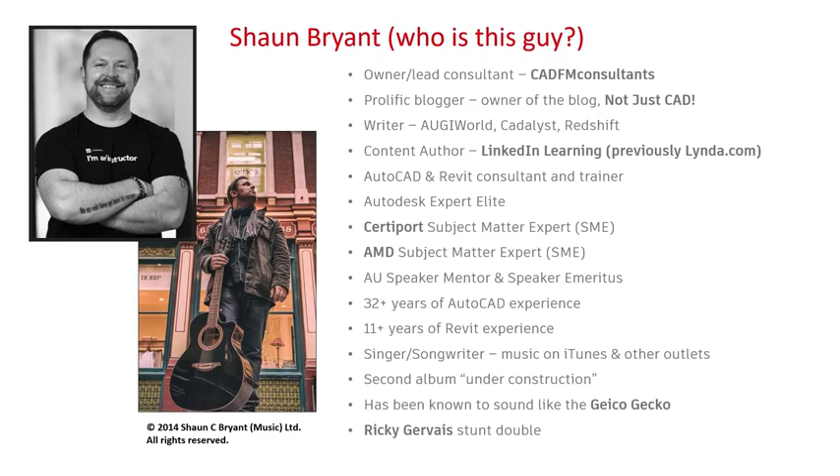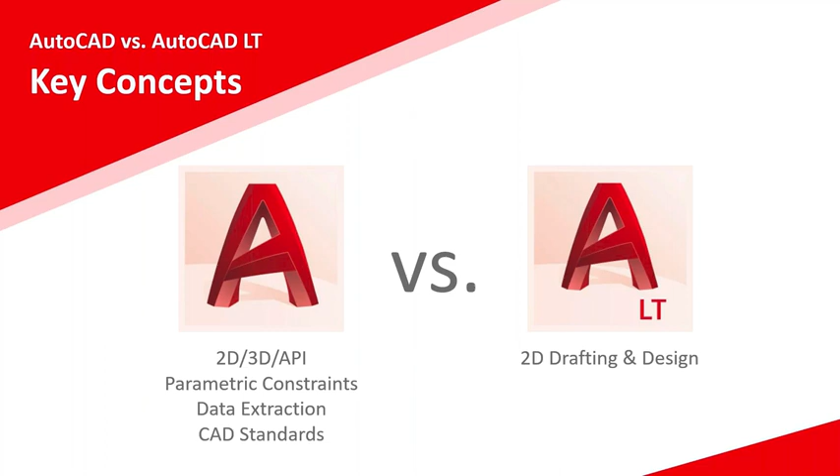We're going to see, from a productivity and time-and-motion environment, how AutoCAD stacks up against AutoCAD LT. Moving forward into a really good visual slide, you basically get an 86% overall productivity gain. There's a little asterisk next to that, and a disclaimer at the bottom saying the study was designed by Autodesk and commissioned to an outside consultant, so your results may differ, you may not get exactly 86%. But to give you an idea, when you're working in full AutoCAD and doing 14 hours of work, that's pretty much the equivalent of 100 hours of work in LT, or vice versa. If you're working in LT and do 100 hours of work, you could do that in 14 hours in full AutoCAD, hence the 86% productivity gain. This means an AutoCAD designer can generate designs up to 7.1 times quicker compared to AutoCAD LT. That's a pretty cool statistic when you think about it.

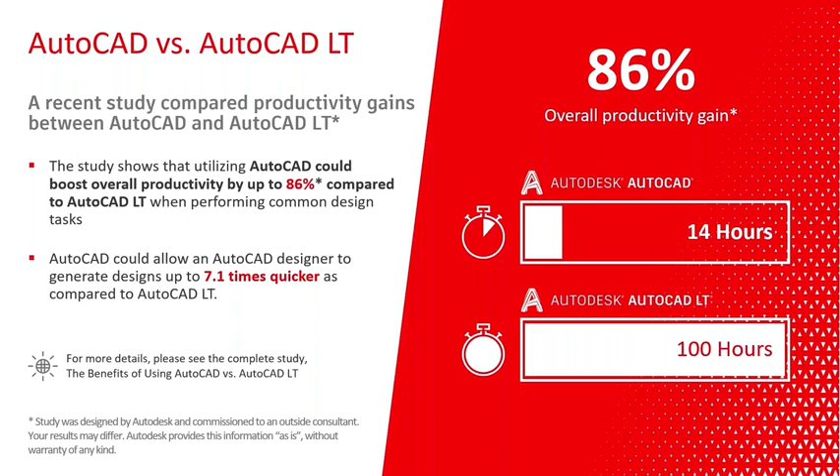There is a productivity study available from Autodesk called The Benefits of Using AutoCAD versus AutoCAD LT, which is the basis of the presentation today, and we're going to go through that in more detail. Let's have a look at what the productivity study actually covered, the time savings. Again, a couple of little asterisks there at the top, a disclaimer just to say that every effort has been made to make sure these tests are as fair and objective as possible.

Your results might differ to the percentages that I'm quoting here on the screen.

Parametric constraints in full AutoCAD offer a complete geometric and dimensional constraint creation, editing and management suite, giving roughly 33% time savings. When creating plans and elevations in full AutoCAD, you can save about 46% because you can manipulate 3D solids when 3D modeling to give you those plans and elevation views, rather than having to create them from scratch in 2D in LT.

Isometric drafting is another fantastic tool available in both AutoCAD and LT. But if you create 3D objects, the isometric representations are just a couple of clicks, whereas in AutoCAD LT you've got to use 2D modeling and isodraft. AutoCAD can view these 3D objects in isometric views almost immediately using the view cube, which I'll go into in more detail later. The time saving here is 61% - a big time saving.

Data extraction is one of my favorites with full AutoCAD, with a time saving of 93%. We've all been there counting all the objects in a drawing. The data extraction command in full AutoCAD, not available in AutoCAD LT, interrogates the drawing, providing block and attribute data and various other pieces of data that can then be taken out of the drawing and put into an Excel spreadsheet or a database. You can even add an AutoCAD table.

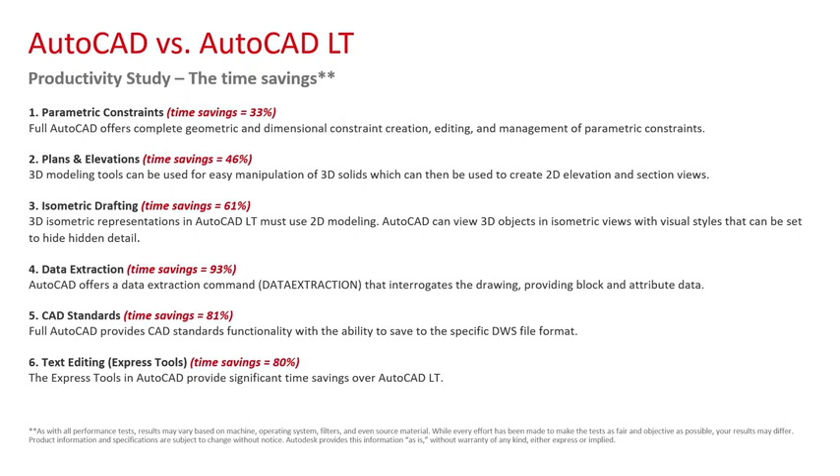And the little disclaimer at the bottom basically says that those percentages might not be exactly what you get if you are moving to the full AutoCAD from AutoCAD LT.

So let's move into the first one - we're going to have a little look at parametric constraints. You've got geometric, which is your geometry, and dimensional constraints in full AutoCAD with a time saving of about 33%. What that means is you can assess the geometric and dimensional constraints using the show and hide functions, so they're not there all the time. You can switch them on and off like your layers, and you can edit and delete those constraints where applicable to allow the design to meet any changes in the specification.

There's no constraint creation in AutoCAD LT, but they can be edited and deleted in AutoCAD LT, which can sometimes put the cat among the pigeons, because you might delete a constraint in LT, it goes back into full AutoCAD in a DWG file, and that constraint isn't there anymore. So you have to put controls and procedures in place, especially if you've got a combination of full AutoCAD and AutoCAD LT as your platform for drafting within your organization.

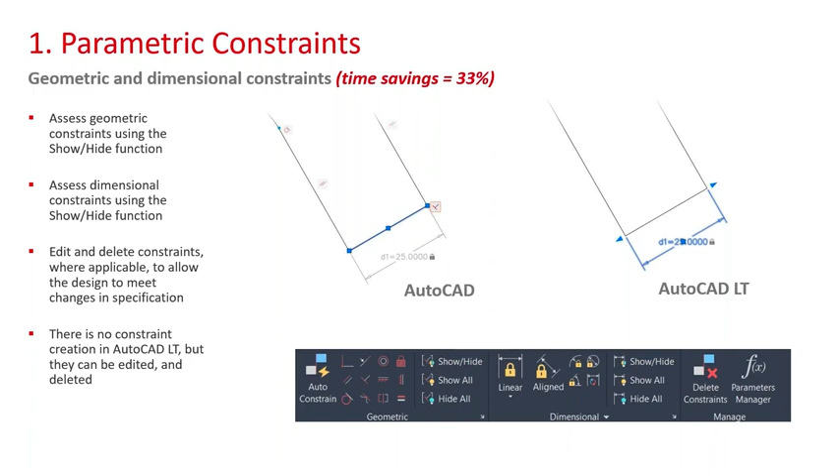What I'm going to do now is jump into a simple little video that takes us through a simple bracket drawing. You can see at the top of the AutoCAD screen, it's bracket.dwg. I'm just going to run the video now, and as we go through it I'll explain what's going on in AutoCAD. We've got the parametric tab in full AutoCAD, and what I'm doing now is hitting show all for geometric and dimensional constraints, of which there aren't any at the moment.

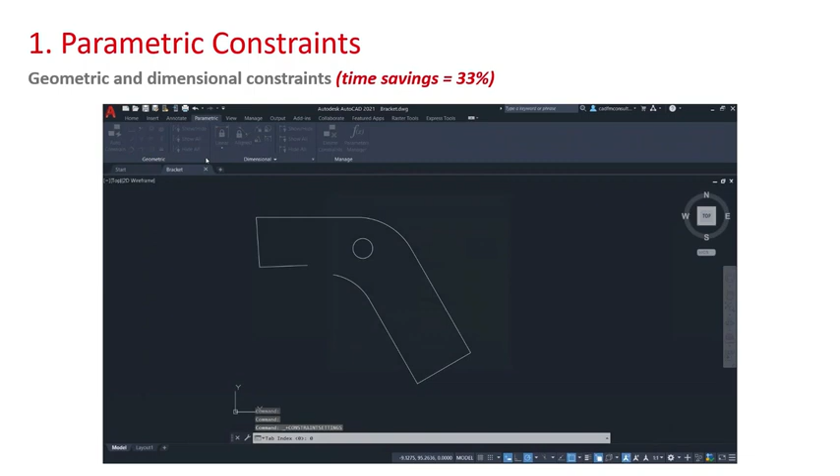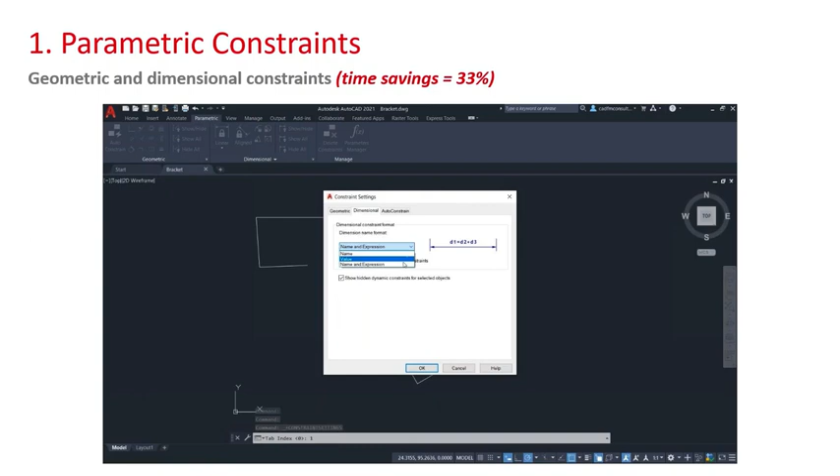Then what we're going to do is jump through all of the settings. You can see that's our geometric constraints for our geometry. If I hit the arrow on the panel, you can see that you can put names and expressions in for your dimensional constraints, for example. And then auto constrain - a fantastic function in full AutoCAD.

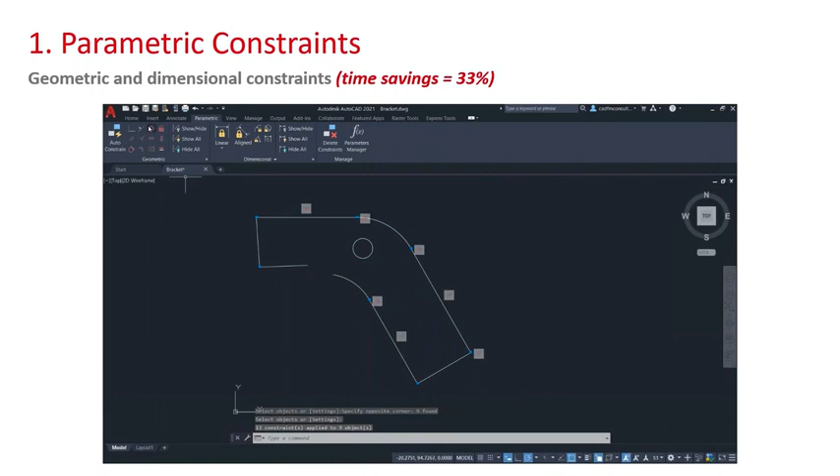Auto constrain applies constraints to all of the geometry for you automatically. So what I can do here is select everything, just use a crossing window, press enter, and there's my auto constraints - they've all appeared, and AutoCAD has created those for me. I can then start thinking about concentric constraints, like making sure the hole in the bracket is concentric with that arc at the top.

And then I'll make sure that we've got some coincident points to join up that gap, so those points now are always coincident together. Then we'll start working on some of the line work, making sure those lines are parallel to each other. And we don't want a wonky corner there, top left, so we're going to make sure that's perpendicular as well. So all of those constraints will hold that bracket together now. And that's our geometry in place.

So now we want to think about dimensions of our bracket. I'm picking those 2 points there and applying an aligned dimensional parameter, and I'm going to put an expression in saying D1 equals 25. So that now becomes the D1 constraint, which is 25 units long and it's locked.

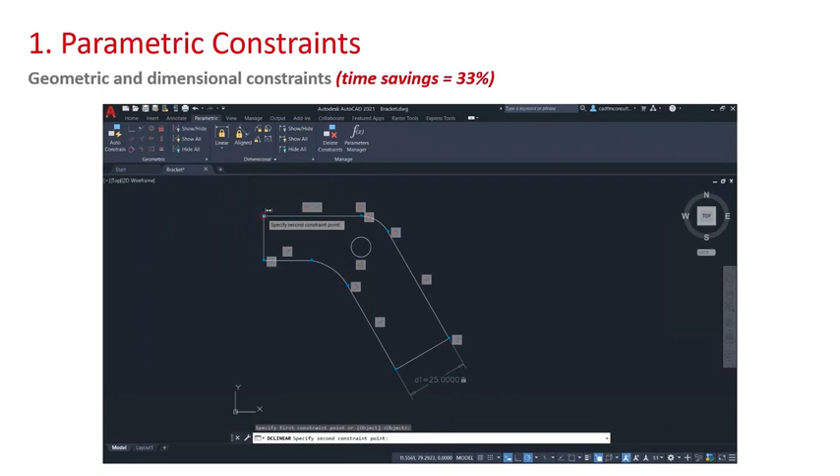I can then consider something like a linear, horizontal, or vertical constraint. I can go linear here because I know that this is already perpendicular to the lines - remember, we put that geometric constraint in. And that's going to become D2, but I'm going to say that D2 equals D1 plus 5. So I'm adding those expressions and tying everything down to pull the bracket together.

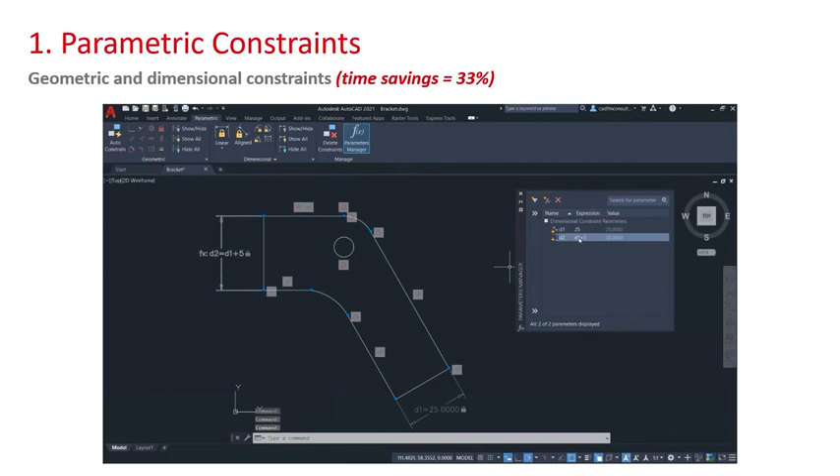So what I've got now is some functions, some formulas. I can manage those in the parameters manager, so I can change that value, for example, and say it's plus 3. As soon as I do that, it updates in the drawing, and the parameters manager will allow me to manage all of those parameters and the constraints and the expressions.

Now, obviously that looks a little bit on the messy side, so I can hide all of my constraints like so, and it just looks like a normal AutoCAD drawing now. But what you've got to bear in mind is you need to interrogate the drawing and switch them back on by using show all if you want to edit and make any changes.

You can also delete constraints if you don't need them anymore. You can delete all of them if you want to. I don't recommend it if you want to constrain the drawing, but you get the idea there.

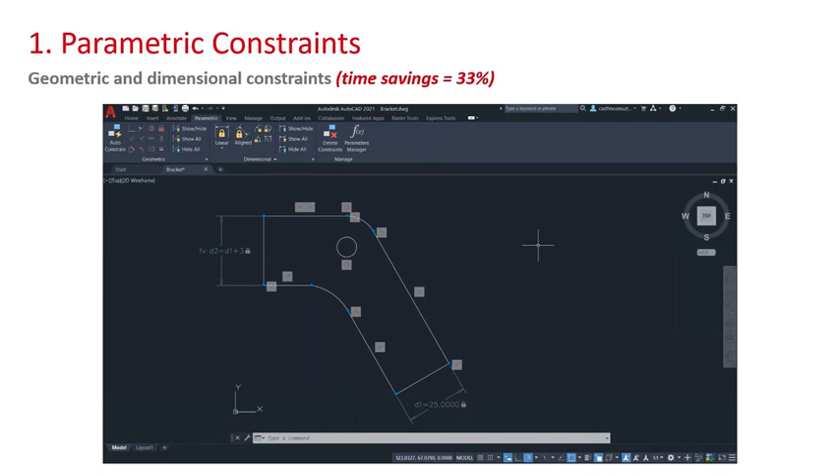So you can see how quick and easy it is, just in those few moments, how to constrain that little bracket drawing, both with geometric and dimensional constraints. It's a massive time saver, and it means now that that is a parametric bracket and you don't have to go in and edit everything individually. You can just edit the constraints instead, and the bracket will obviously update accordingly.

So in AutoCAD LT, I would have to develop all of that. I'd either have to draw the plan view first and then put the dashed gray construction lines in, and using object snap tracking, draw in the window position and the wall position.

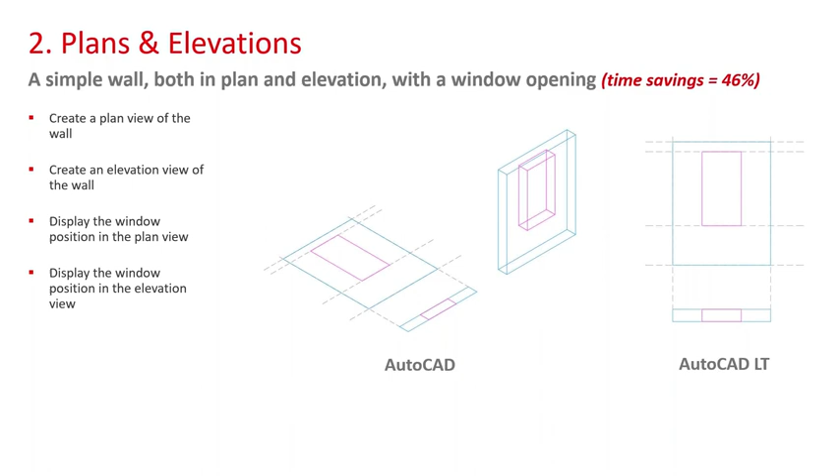So let me just explain that by way of a video. And as they say, a picture paints 1,000 words, or in this case, a video.

So we'll jump across. And as you can see there, I've got all the construction lines in place on the left. Imagine that that is AutoCAD LT on the left, which kind of goes against the slide, but it's just the way it is in the drawing. And the little plan view on the right is actually a 3D representation of the wall, but we're looking at it in the top view in the view cube. So let's run the video.

And what we'll do now is we'll place our wall and our window in our 2D representation. So I'm just going to utilize the rectangle command on the draw panel, and good old object snaps.

I can pick that corner there, and I'm on the walls layer, so I don't need to worry about the color or line type, etc. So there's my wall representation.

I'll jump into the windows layer now, and what I'll utilize now is a little bit of polar tracking and object snap tracking, which I'm sure you've all utilized before. So I'll hover over that corner there, come up to the intersection with the construction line, and again hover over the other corner in the plan view and come up to the other construction line. There's the intersection, and there's my window representation in 2D.

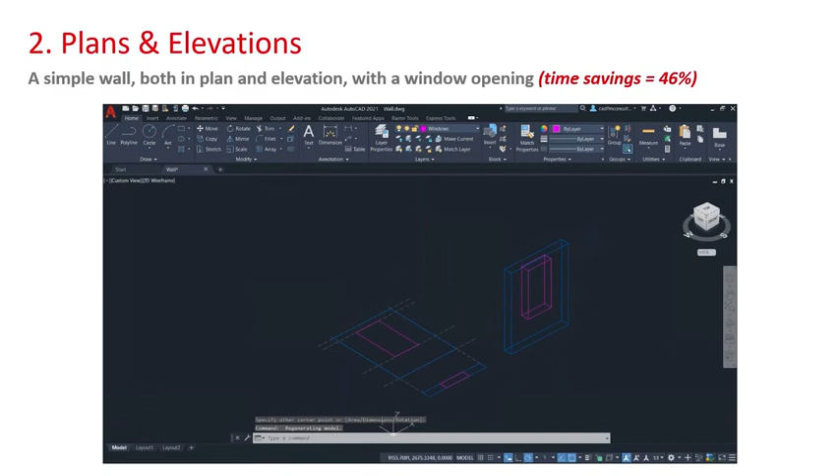So that's all flat, and I've had to draft all of that manually. Now here's the trick. What I can do now is a little 3D orbit there. My wall and my window are already there in 3D, so I've already got a top view, front view, side view, etc. all in place already. They're just dumb 3D solids to represent a wall and a window at the moment. I can go into a lot more detail later in the 3D modeling.

And then if I jump into the conceptual visual style as well, one of the benefits you have there as well is you can apply colors and materials in 3D to give you a much more realistic view of your wall and your window. And the trick there is that you've got that fantastic view cube, and the view cube just saves so much time.

I can look at the front view, there's my elevation. And what I can do there is jump to the top view, and there's my plan view there as well. Saves me having to draft everything individually. Those views are already there because I've already got the 3D solids that represent that wall and that window.

So that's where, in an overall perspective, you're getting that time saving of around 46%. You can see there in full AutoCAD, if you're working in 3D as against 2D in AutoCAD LT, it gives you an automatic time saving because you can start developing things using 3D solids and utilizing the preset views in things like the AutoCAD View Cube as well.

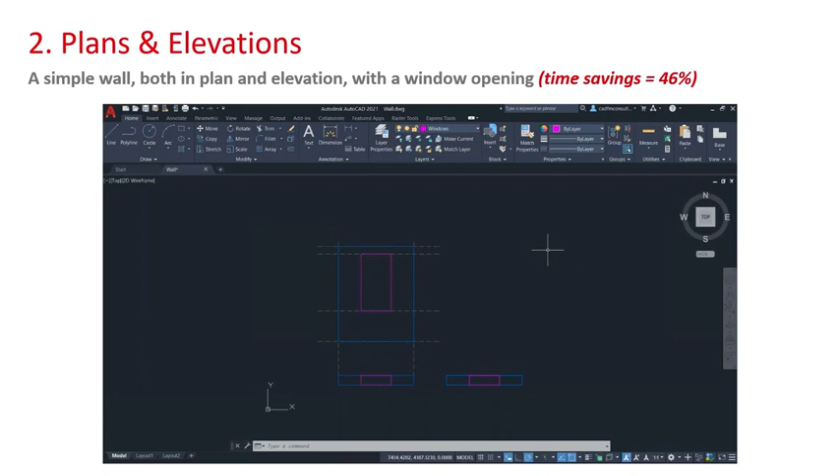Moving along now, we're going to have a look at isometric drafting. Now, this kind of relates to the previous video a little bit. And what we're going to look at is an isometric view using the X, Y, and Z axes in their isometric positions. Now, the time saving here is 61%.

And what it means is you can generate the rectangular base in an isometric view. You can do that using IsoDraft in 2D, but if you do it in 3D, again, you've got those preset views on the View Cube in full AutoCAD that you can utilize. And more importantly, the hidden lines can be hidden using various visual styles if need be as well.

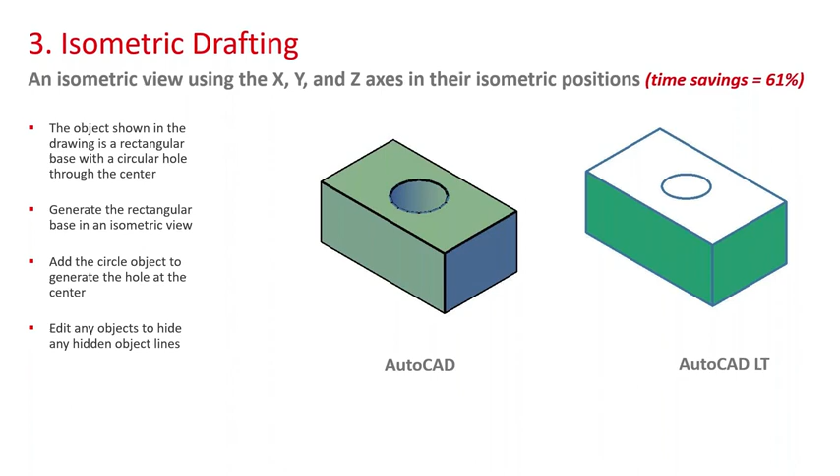So let's jump into another video and I'll take you through this again, very briefly, on how you can get those time savings of 61%. So you can see there on the right, that is purely 2D drafting. There's a hatch pattern and there's some lines representing what looks like a rectangular base with a hole in it, and that's the ellipse that I mentioned.

Now, if I start looking at IsoDraft there and switching on the status bar, can you see I'm changing the positions of the lines, the axes on the cursor, and that basically kind of works in an orthogonal kind of setting, because what it does is it ties you down to drawing lines at those angles in the IsoDraft to allow you to create that 2D representation of that isometric view of the base.

Now, if I jump over to the View Cube, you'll see we've got a 2D wireframe view of our solid base. If I go to conceptual, you can see that's a solid, and if I look at the top, I'm looking straight through it. There's a hole through that solid.

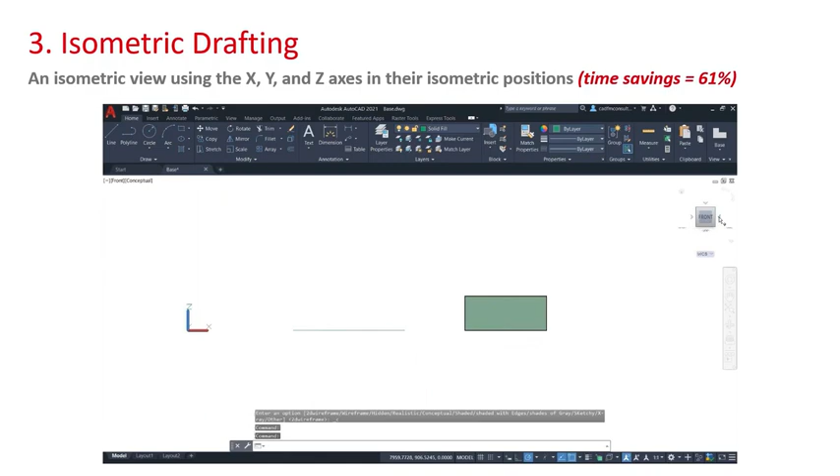And just like in the previous video, you can see we can jump around and pick any view we want on the View Cube to look at our little rectangular base with the hole in it. But the funny thing, and this always throws me when creating 2D isometric representations, as soon as I go to an isometric view with the View Cube of the 3D solid, you can see that the 2D AutoCAD LT representation goes all wonky and skewed.

That's because it's purely a flat 2D representation of an isometric view. And that's where you're getting the time savings. If you start generating things in 3D, in full AutoCAD, you've got those preset views in 3D already set up for you. So you've got top, left, right, front, back, bottom, etc.

And that makes your life so much easier because you can set up different viewports to look at those different 3D views as well. So what you've got there is a tool that allows you to give a view on every single face of that 3D base with the hole through it, whereas I'd have to draw a lot of different isometric views using the IsoDraft in 2D in AutoCAD LT. So you can see there another time saving based on working in 3D as opposed to 2D.

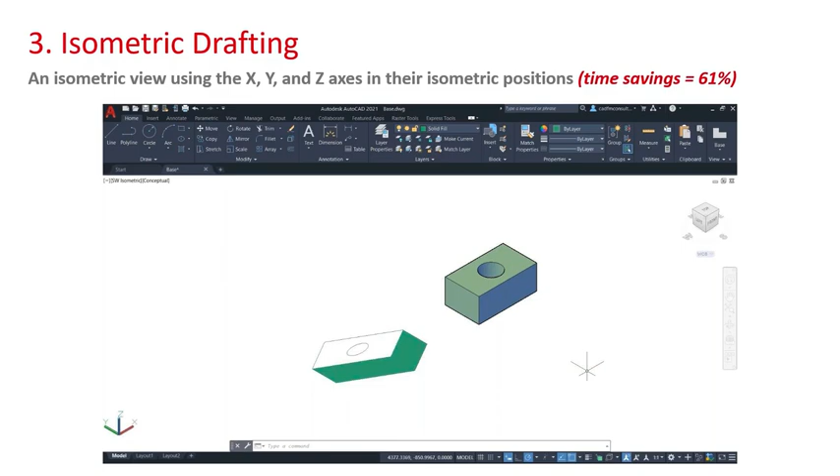We're now going to look at one of my favorites. Data extraction is a fantastic tool. I loved this as a CAD manager. One of the things I work with - the name of my company is CAD FM Consultants - and I worked in a lot of facilities management environments with AutoCAD and with a lot of computer-aided facilities management tools and things. And one of the things we always had to do was suck blocks and attributes out of drawings and put them into a tabular format.

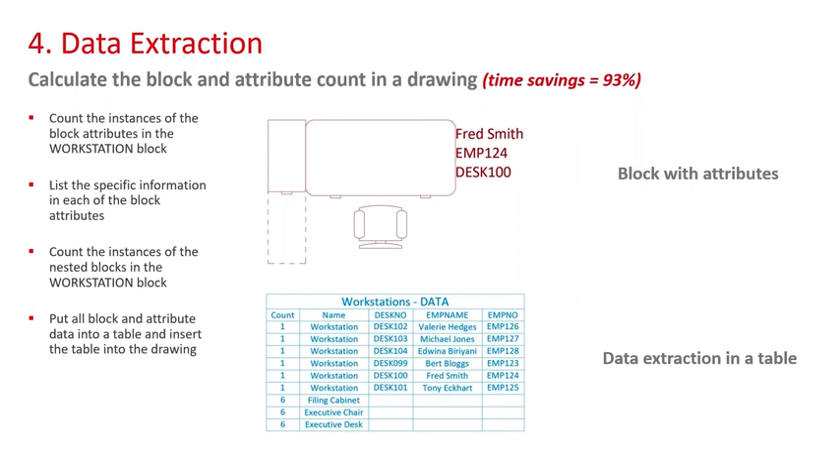So here's another little video for you, and as you can see, we're in AutoCAD and we've got 6 of those workstation blocks all set up. When I run the video, if we just hover over some of those, you'll see that they are a block with the attributes. So there's Michael Jones there, we've got Edwina as well, and all of these employees have their own desk, and obviously it's a block with attributes.

So what I've done, I've just jumped into the tables layer, and I'm going to go to the Insert tab now, and I'm going to run the Extract Data command in the Linking and Extraction panel. And this is fantastic because it takes you through an 8-step wizard.

All you've got to do is literally follow the steps, step by step, setting the settings in each particular page. So what I'm doing here is saving my DXE file, my data extraction file, because then it'll remember all of the settings I've set up in the wizard, and I can go back and open it up again. I'm overwriting the one I created before the presentation to test it.

So you can see there that we're using our current drawing, and I can go in there, I can add additional settings. I can also add other folders and other drawings to extract data from.

It doesn't have to be one individual drawing, for example. I can also select, as you can see there, individual objects.

Now, when I jump to the next step, you can see I've got various options available, and the display options are at the bottom. So what I'm doing is setting up my display options to show what I want to see, my objects, my display names, the type of objects, and so on. Now you'll notice it brings up everything, every single piece of information.

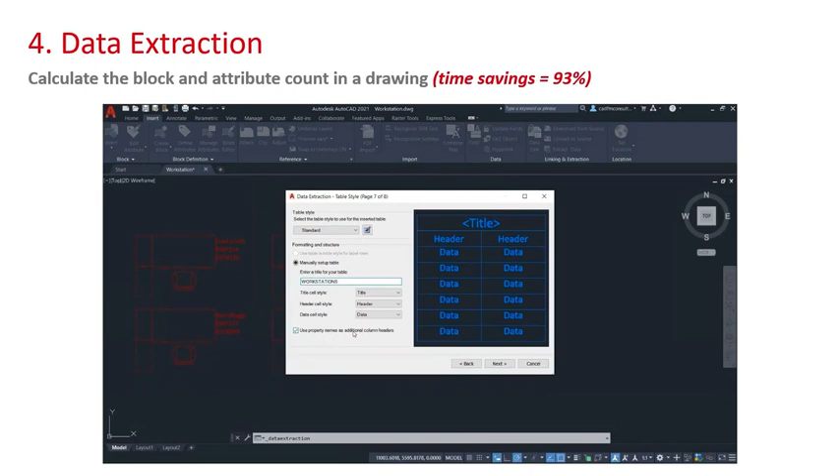Just using the standard table style, I haven't got any other ones set up. I'll give the table a title, so I'll just pop some text in there saying workstations, and I can change the title, header, and data cell styles if I want to, and I click on next.

Now it's finished the extraction. I click on finish. Now my table's a little bit small, but I'll drop it into the drawing anyway. I'll zoom in on it, and there's all my information there.

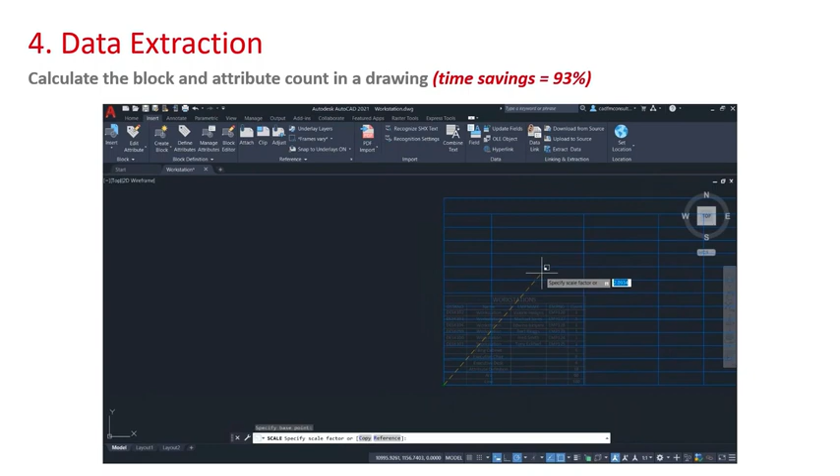So you can see it all there already, but I'm just going to make it a bit bigger so that we can see what's going on. I'll just scale that up, pick a base point, and give that a largish scale factor of, say, 20. Now when I zoom out, that table will be bigger, and I can read all the information, and it relates to the workstation blocks that we've got in the drawing itself.

So you can see how quick and easy that is. That was really fast. Now, obviously, I've only done 6 blocks there with attributes, but imagine if you've got 500 desks on a big office floor in a big corporate building. That's going to save you so much time. That's why you've got that massive time saving of 93%.

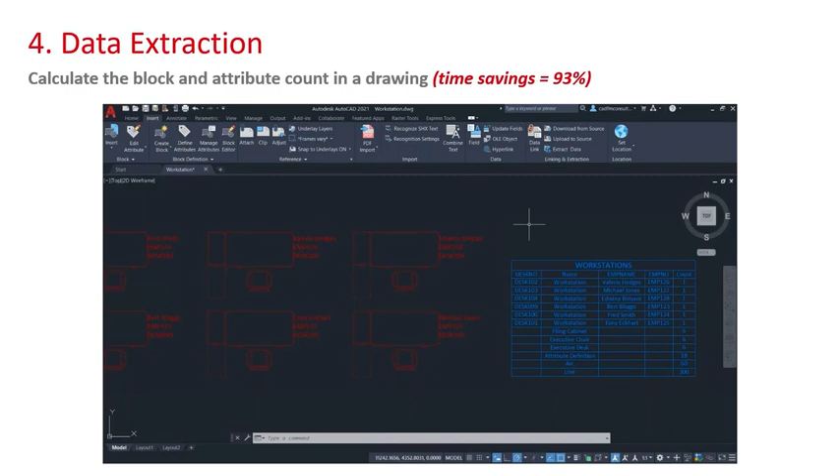That data extraction tool, when you're using blocks and attributes, is fantastic. It's really quick. And it's one of the things that always makes me vouch for full AutoCAD as against AutoCAD LT.

Another one that I used a lot, especially when I was a CAD manager, was the CAD standards functionality in full AutoCAD. So you've got the ability to check layers, text, dimensions, and various other things against what they call a preset CAD standard. That's your DWS file. And again, big time saving here, 81%.

So what you do is you locate the CAD standard, the DWS file, and you then link it to the DWG file that you're working with. You check and adjust any perhaps third-party drawings, and the DWG file is then adhering to the appropriate standard moving forward.

I used this one hell of a lot when I was working with third-party drawings coming into my company, and I needed to make sure that all the drawings adhered to my standards so that then everything worked with the project and worked accordingly.

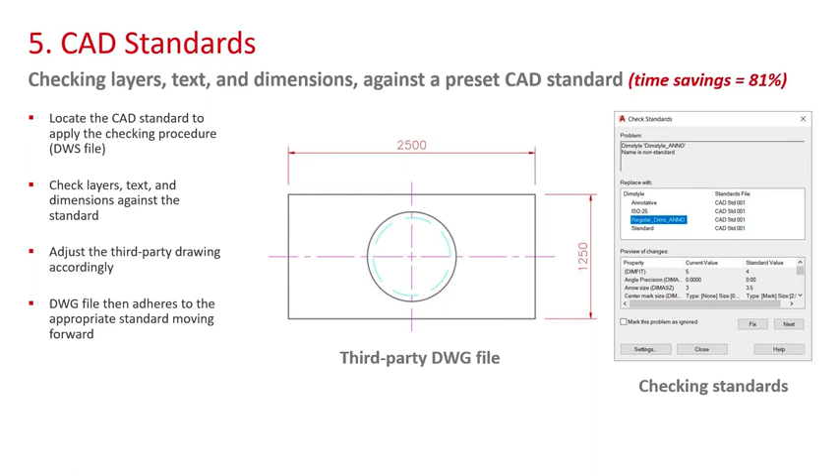So again, I've got another little video for you, and we'll jump into the video. So there's our little third-party drawing.

It's a little project drawing.dwg file. The dimensions themselves are great, they communicate your design intent quite happily, and you've got your different line types and different colors for center lines, the outline, and you've got some hidden detail there on the little circle in the center.

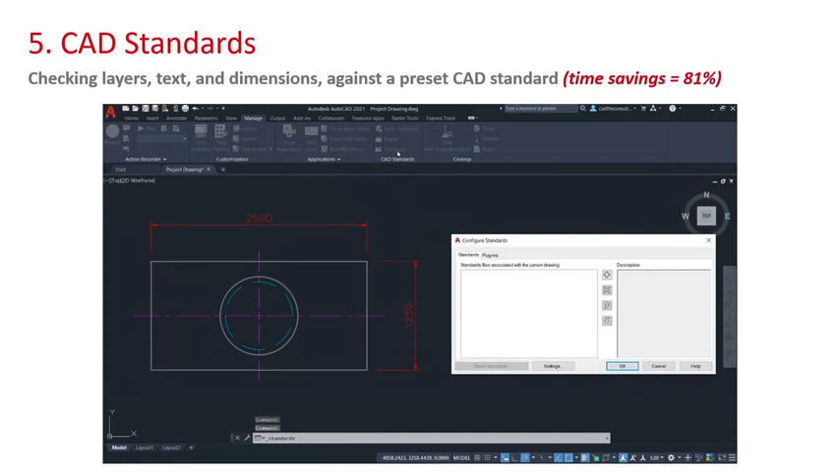So if I now go to the Manage tab and go to the CAD Standards panel, I can configure my CAD standard setup. So what I'm going to look for now is my DWS file. I click on the plus sign, and there's my CAD standard 001.dws. Now you create that from a blank drawing with all the settings that you need and save it as a DWS file. That's now been associated with the project drawing.dwg file.

And what I can do now is start checking my standards. So I go up to check, and there's the dialog box I mentioned. So the idea now is I just work through each of these problems that pops up. You can see there's the dim style there that's non-standard, and I can say okay, I want to apply that, replace with regular dims anno, or I can mark it as ignored. So it jumps to the next problem.

And then what I can do is click on next, like so, and it always gives me the option to jump to the next problem. And all I do now is go through and select what I need to change. So you can see that the layer outline is going to the layer objects, for example. The layer text annotation, I go and replace it with one of the layers, which in this case is text in the DWS file. And every time I hit fix, it's actually updating those in the DWG file.

So what it's doing is swapping out using the information in the DWS file and updating the third-party drawing as we go. Now, there's a lot of information here, and all I'm doing is hitting fix and next, fix and next. It can be a laborious task, but the one thing I will say here, if you look at the time saving, it's much quicker to do it this way, and then you know your drawings are adhering to a known standard.

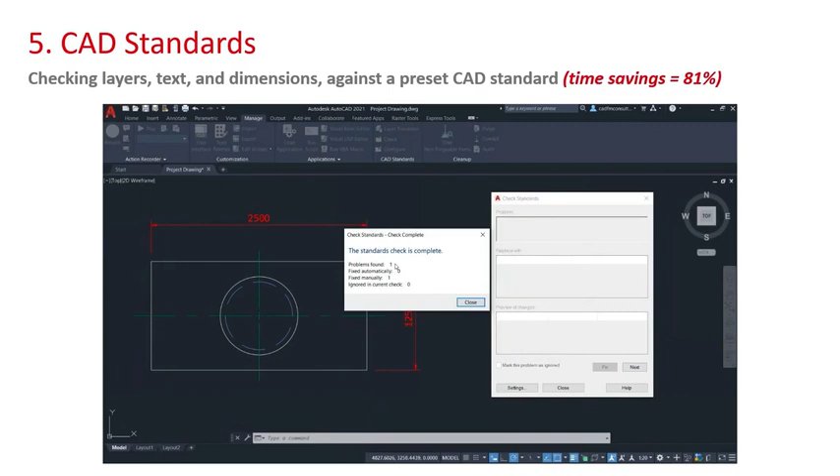I'll switch off the ignore tick box, click on next, and what you'll find this time is there won't be any more problems. So I'll make sure that we've got the appropriate dim style and fix it, and you can see there that the problem has now been fixed manually, and I can close that, no more problems, close the dialog box, and my drawing has now been updated to my standard that I had in the DWS file.

And you can see that in the drawing itself, the color has changed on the center lines. You can see the font has changed on the dimensions, little things like that. And it's little things like that that take up all that time when you're working in AutoCAD LT. The trick here in full AutoCAD: create the DWS file and check all the drawings against it. Saves a lot of time, 81%.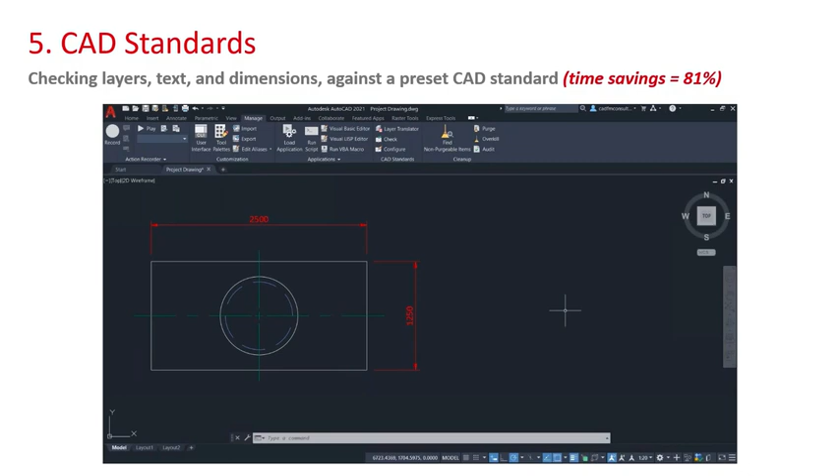Moving along now, we're going to have a little look at the text editing in the Express tools. Now, I love the Express tools. I'm a big fan of the Express tools in AutoCAD because there's some really wacky and diverse functionality in there. One of the ones I love is putting text along a curve, for example, which you can't do in LT because you haven't got the Express tools.

We're going to look at converting single line text to multi-line text, changing the text from all uppercase to mixed case or sentence case. We're also going to enclose the text in an AutoCAD rectangle object, which allows for quick and easy text editing to communicate your design intent, since it's all multi-line text that works almost like a word processor. Look at the time savings you get in this case: 80%.

If you look, we're changing the text from the before option there in the slide to the after option. You can see the difference. But if I jump into the video, it's again a video paints a thousand words, as I say.

So if I jump into this one, you can see there's our text in our drawing. If I hover over that, you can see each line of the text is a piece of single line text, and I want that to be multi-line text. So I'm going to go up to my Express Tools tab on my ribbon. You can see there's some really cool functionality in here, and a lot of this has been written by third-party developers. I'm going to hop over to the text panel in the middle there.

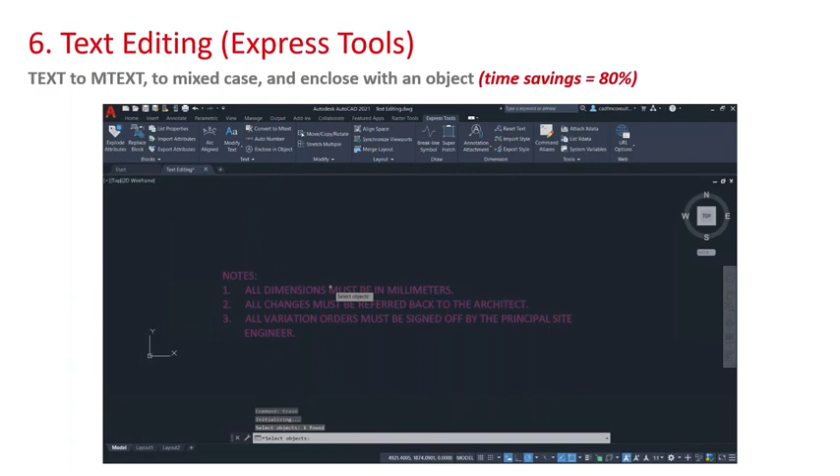And now I press enter, and I want that to be sentence case instead of caps. Click OK, and as you can see, it all updates. It's not so shouty now. I find notes in capitals very shouty. So what I'm going to do there is just make sure that the notes is in capitals, because that does need to be in caps. As you can see, it just looks that little bit more professional on your drawing.

So we've done that, and now we want to enclose this in an object to highlight the notes on the drawing. So I can select the text, and for the offset factor there, I'll just put a fairly random number in, let's go for 0.5, which is basically, in essence, half the height of the text. We'll enclose that with a rectangle. Do we want that to be constant or variable? Well, it's multi-line text, so we should go variable, because then when we make the multi-line text bigger, the rectangle will stretch with it. Can you see how that looks totally different to the text that we originally had?

The benefit you've also got there now is it's multi-line text, all one object, so it's quick and easy to edit. You've got the rectangle around it now, which also highlights your notes on your drawing as well. So again, you can see there, time savings. I don't have to think about the spacing of that rectangle around my text, because the enclosing object in the Express tools allows me to do that and specify a factor, and it can also be variable, so that when I do stretch my multi-line text notes, the rectangle stretches with the text. Again, time savings there of 80%, and you can see why. It's very quick and easy to utilize those text Express tools in the Express Tools tab.

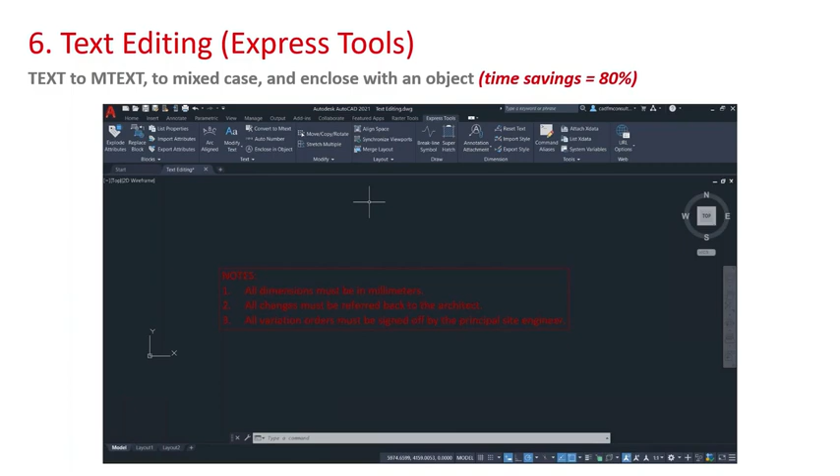I haven't actually got a video for the next one, but I do want to talk you through it because it's really important. Full AutoCAD offers what they call an application programming interface, an API. Now, some of you might already be programming in AutoCAD. You might have some macros, some routines that you've created, perhaps using Visual Basic or Visual Lisp. There's an applications panel there, you can see it on the slide top right, where you can load up the application and then run the script, for example, if you want to run the script within AutoCAD itself. And what you're doing there is you're utilizing user programming through the API to automate some of those tedious, time-consuming tasks.

So, for example, RevCloud is a really good one. That was developed using the API. It originally was an Express tool, and it's now come into the actual AutoCAD ribbon. It's not in the Express Tools tab anymore. It's actually coming off of the Draw panel on the Home tab on the ribbon.

User programming allows people to develop apps that will benefit AutoCAD users in your team. You can jump onto the Autodesk App Store - you can see that on the slide there as well. It's very easy to find: just type in Autodesk App Store in your browser and you'll get that screen, where you can find various apps available for you.

Those time-saving apps provided are created by third-party developers using the API, but they're in essence selling their wares. So if you've got a macro, a routine, an app that you've developed, there's nothing to stop you becoming a developer and putting that onto the App Store as well - another time saver.

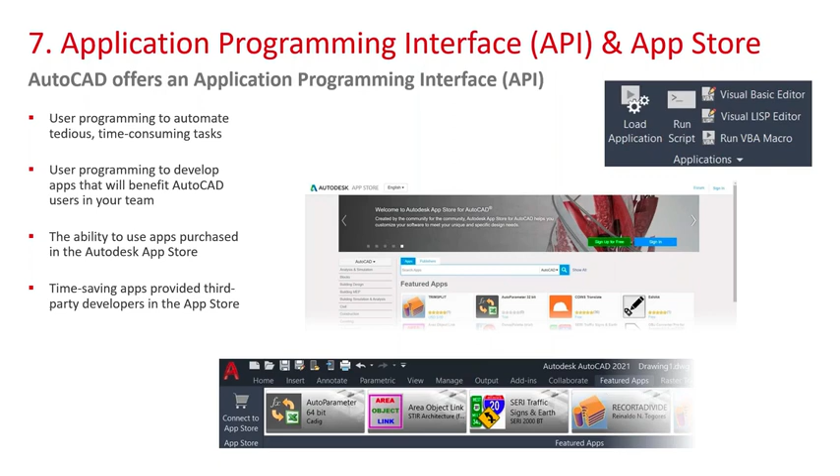So let's have a look at the numbers. How does this all work? How do the overall time savings work with full AutoCAD versus AutoCAD LT?

In the productivity study, there's a table, and I've tried to replicate it as closely as I can in the slide. The drafting tasks that we went through in the productivity study were parametric constraints, plans and elevations, isometric drafting, data extraction, CAD standards, and text editing using the Express tools. We logged the time against each of them in minutes and seconds.

There's the time savings, which is what you've seen on the slides and videos so far. To give you a rough idea, performing those 6 tasks in AutoCAD LT is roughly 5 hours 44 minutes. If you did that in AutoCAD, it takes 48.5 minutes, and that's the 86% time saving we talked about earlier. So the overall time saving with AutoCAD is 86%, meaning a productivity improvement where you're doing everything 7.1 times quicker. There's your time saving and your productivity improvement.

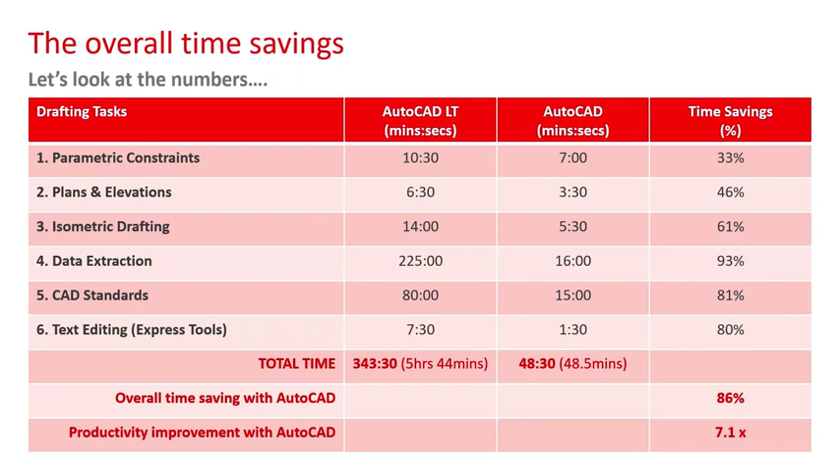It's kind of self-explanatory when you think about it. However, I'm not going to knock AutoCAD LT - if you just want to do 2D drafting, it's a fantastic tool. I cut my teeth in AutoCAD on AutoCAD LT many years ago and used it for many hours; it's a great product. However, as I became a more versatile AutoCAD user, the functionality in full AutoCAD, especially things like CAD standards and data extraction, became more imperative to me, so full AutoCAD became what I wanted to use.

One of the things you'll find now is if you sign up for an AutoCAD subscription, you don't just get AutoCAD - you also gain access to industry-specific tool sets. So you get 7 specialized tool sets as well: architecture, electrical, mechanical, MEP, Map 3D, Raster Design, and Plant 3D, so you can work within various industries.

One I often use is the electrical tool set. It's a totally different workflow to regular AutoCAD, but it has to be, because you're working in an electrical environment rather than just a vanilla 2D or 3D drafting environment in full AutoCAD.

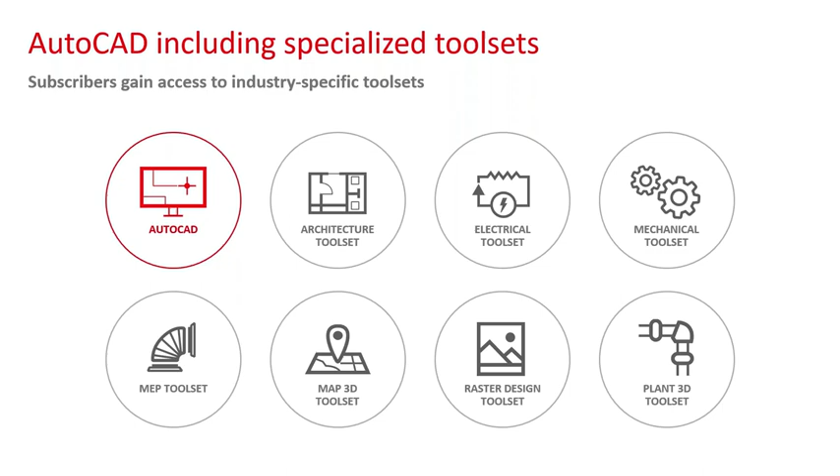The key benefits of those specialized tool sets - which you wouldn't get with LT - are access to loads of libraries of symbols, parts, and detail components. The electrical tool set, for instance, is full of symbol libraries for all the different electrical components used in electrical and instrumentation drawings. It also lets you be faster, with creation of annotations, layers, and properties automated in some tool sets. However, it's familiar - it's the same AutoCAD interface and engine you're driving, just with an industry focus.

It's also efficient - you can extend these workflows across your disciplines more effectively. For example, if you're working in the electrical environment, you can create your drawings in AutoCAD Electrical, the electrical tool set. They can then be shipped out as regular drawings if need be, but you've still got that industry-specific discipline information in the drawing if you need it.

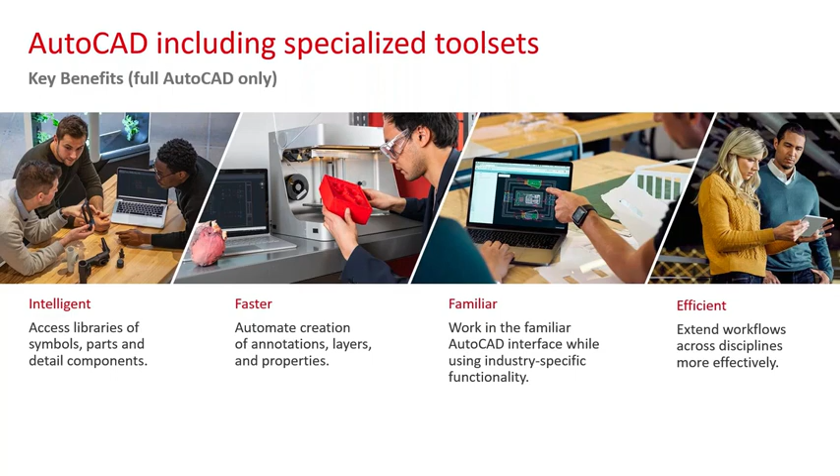The flexible term lengths is a really good one because you can sign up for a specific period of time, you're not there all the time. So you might have a big project on the go where you're bringing in, say, 50 CAD draftspeople through an agency because you need that workforce at the time. So you subscribe for a particular term length, and then once you're done, you can say to Autodesk, I don't need those anymore, can you take those off my subscription? From a monetary perspective you're saving money, and you can be really flexible and agile with your workforce. As the workforce gets bigger, you sign up to more licenses, as it gets smaller, you bring that license count down. And the admin tools allow you to do that quickly and easily.

Obviously, up-to-date software, if you're on subscription, you're always going to be having access to the latest features and versions, but also you can go back to older versions if you need to. And you've always got the good old Autodesk technical support there as well.

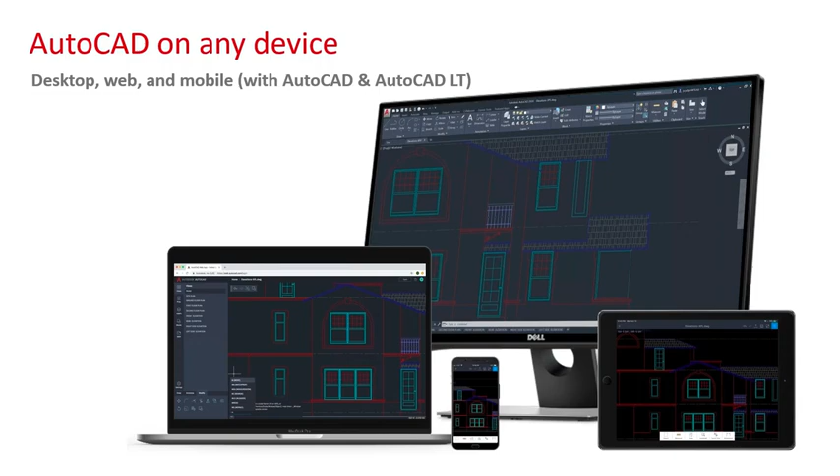What I love is it basically means you can take your work on the road with you. I can remember back in the day I was using house bricks to hold drawings onto the hood of my car so they didn't blow away when I was working on site with the guys. Don't need to do that anymore. I can walk around with a laptop, a tablet, even a phone if I want to, and I've got access to my drawings.

You've got extended workflows there. I can be working on, say, an iPad Pro using either AutoCAD Web or the mobile app, and I've got that extended workflow. I can view, edit, annotate on any device, desktop, web, and mobile. But the benefit is it's all AutoCAD. You've still got that core AutoCAD engine, that core AutoCAD ethos, regardless of which device or which app you're using.